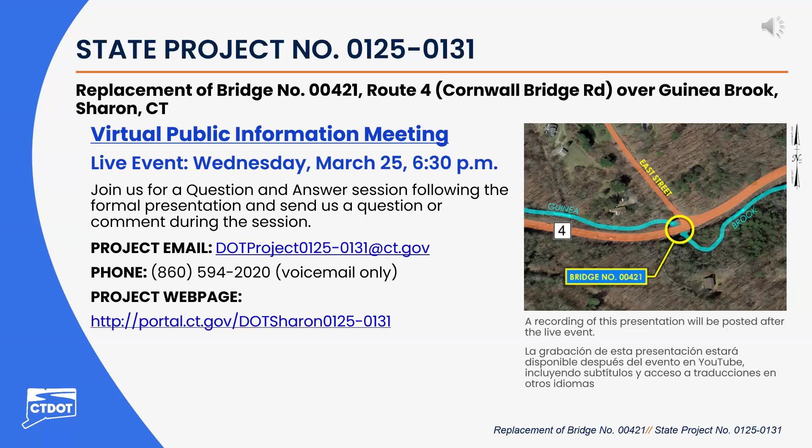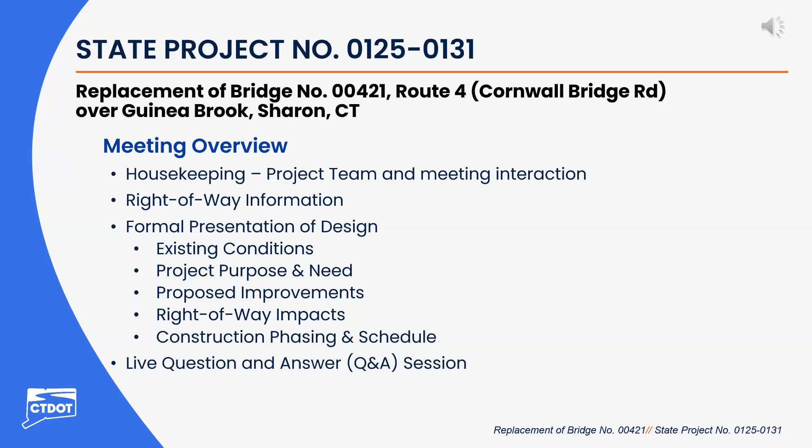Before we get started with the main presentation, I want to walk through the goals and format for tonight's meeting. First, I will introduce the project team, including the CTDOT leadership, the consultant liaison, and the design team. I will also explain how to interact with us during the meeting. Then we will have the technical portion of the presentation, which will include the condition of the existing structure, the purpose and need for the project, and the proposed preliminary design. Following the technical presentation, we will open it up for comments and questions.

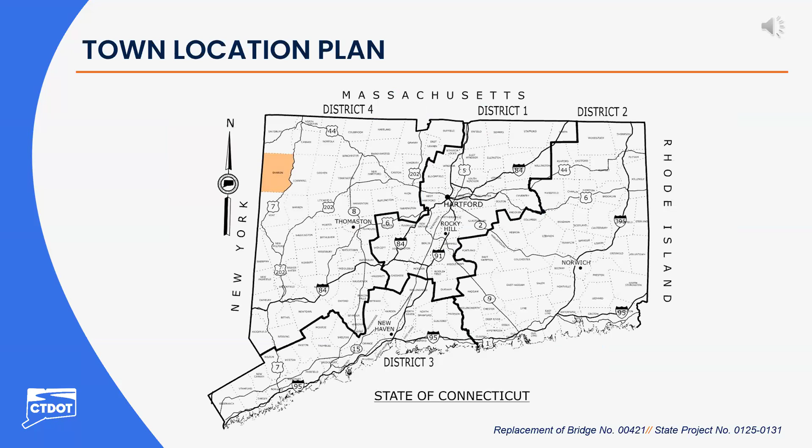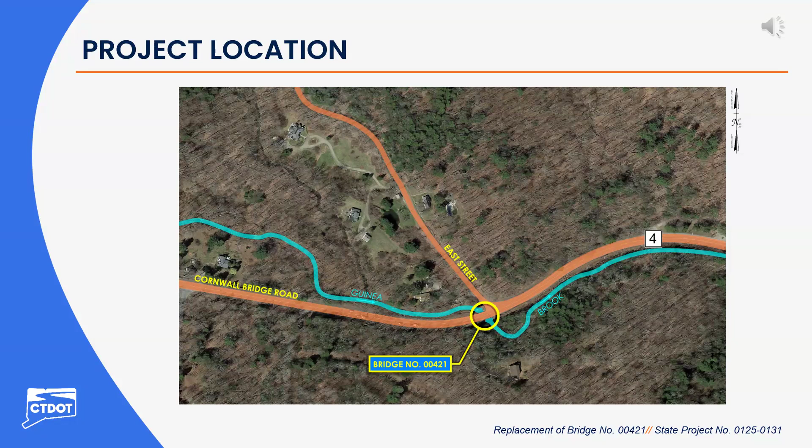This slide shows a map of Connecticut and highlights the location of Sharon relative to the rest of the state. Note that Sharon is part of Connecticut Department of Transportation District 4. Here you will see the location of the project site relative to Route 4 and East Street. I will now hand the presentation over to Jack Carlson to discuss the rights-of-way process.

Thank you, Corey. Good evening. My name is Jack Carlson, and I'm a project coordinator with the department's Division of Rights-of-Way. Our office is responsible for acquiring the private rights necessary for transportation projects.

As you'll see as the presentation continues, this project will require the acquisition of property rights, so I'd like to give a brief overview of the department's acquisition process. Any required property rights will be acquired in accordance with Connecticut General Statutes sections 13A73 and 13A98E, as well as the Federal Uniform Act. Additionally, I'd like to note that the specific right-of-way impacts for this project are still being finalized and may change as the project design progresses.

The right-of-way acquisition process begins once the project design has progressed to a development milestone and all of the impacts have been determined. At this point, each affected property owner will receive from our office a formal letter of intent to acquire, or what we call our initial letter, along with a property map which depicts the specific property rights that are being acquired. Next, our office will determine the fair market value of those property rights, which will be used to establish an offer of just compensation.

That offer will be sent out to the property owner in writing, and a rights-of-way agent will be available to meet with the property owner to explain the project, go over the specific impacts to their property, and review the department's offer. The property owner will then have a reasonable amount of time, typically 30 days, to consider the department's offer and enter into negotiations.

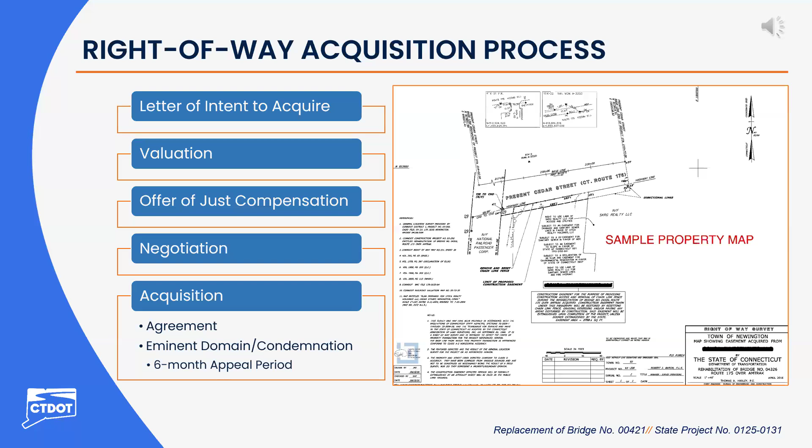Thank you, Jack. Again, my name is Jeff Parker. I am a principal engineer with CHA Consulting. CHA is a consultant liaison engineer for CTDOT, and my role is to work with the design engineer and help oversee delivery of the project.

I will be presenting the technical aspects of the project on behalf of the design team, including details of the preliminary design that is currently in development. First, some discussion on bridge number 421.

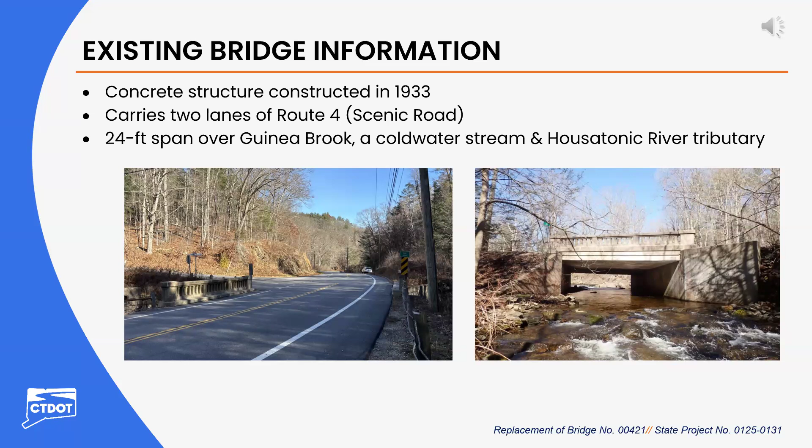This is a 93-year-old concrete structure built in 1933. The bridge carries 2 lanes of Route 4 and spans 24 feet over Guinea Brook. Interestingly, Guinea Brook is classified as a cold water stream and fish habitat and as a tributary of the Housatonic River. The latest bridge inspection was completed in March of 2025 and rated the overall structure in poor condition.

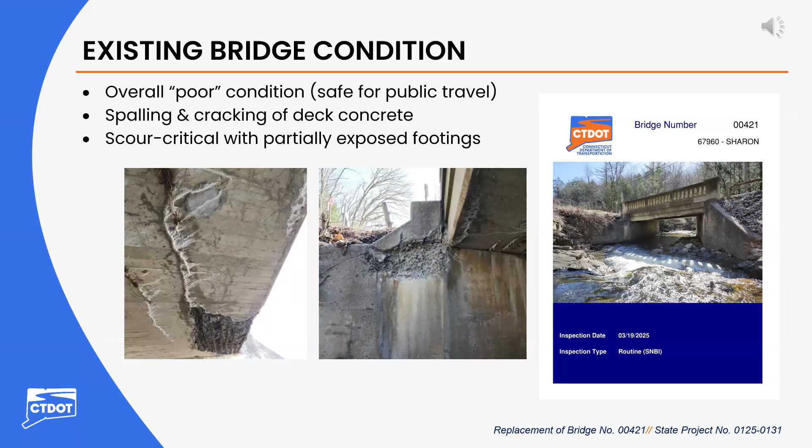The purpose of this project is to address the structural and hydraulic deficiencies of bridge number 421. The need includes providing a safe, cost-effective, and low-maintenance solution to address these deficiencies. The need also includes conveying the 100-year brook flows and providing scour protection at the brook crossing.

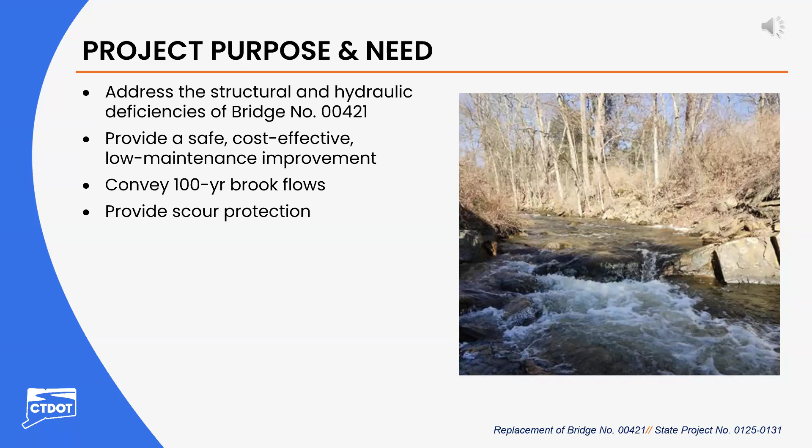The proposed bridge will span 39 feet over Guinea Brook, compared to the existing span of 24 feet, which improves the hydraulic capacity of the brook crossing.

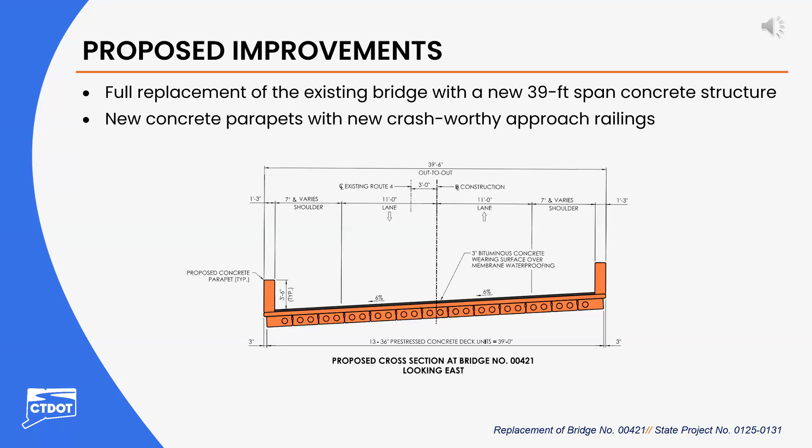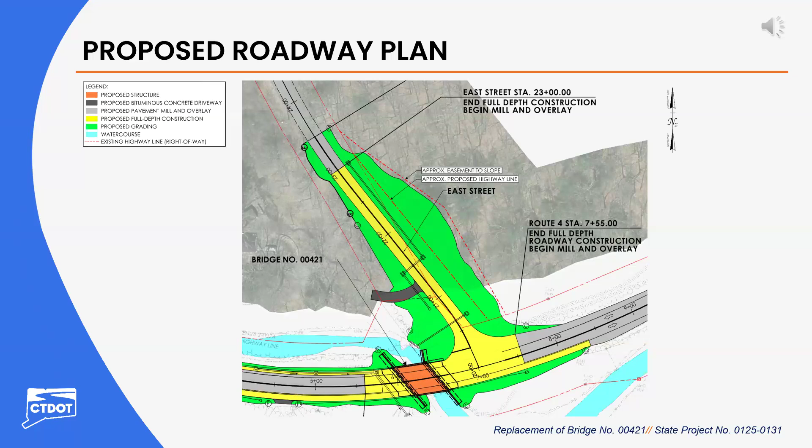There will be some permanent property impacts, which we'll discuss in a few minutes, due to the required grading along East Street, shown in green on the plan. The work along East Street will also include modifications and improvements to the existing drainage system and replacement of the existing pipe that outlets to the brook.

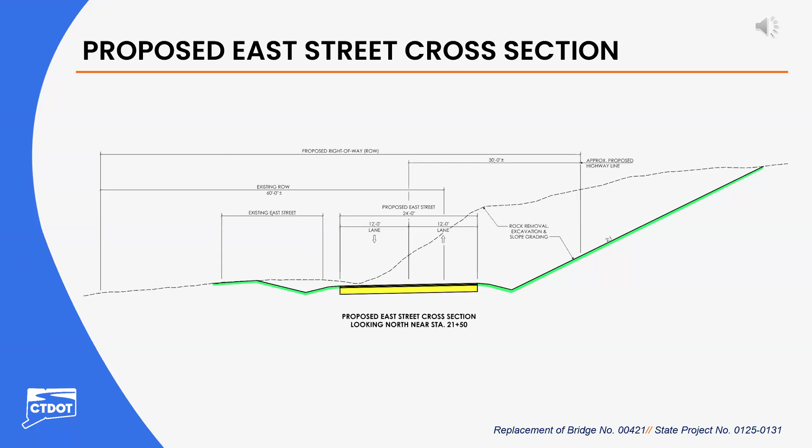The roadway is proposed to be 24 feet wide to meet the minimum standard width and will have graded swales as needed to capture and convey stormwater runoff along the roadway.

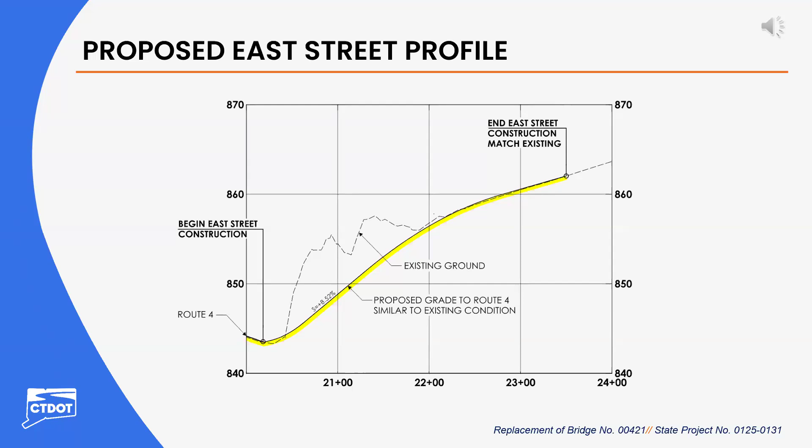The important point to note here is that the proposed grade on East Street approaching Route 4 will be approximately the same as the existing grade and will flatten out at the stop location.

As discussed on the proposed roadway plan, the realignment of East Street will provide space for a crash-worthy approach railing at the northeast corner of the bridge and will improve turning operations from East Street at the Route 4 intersection. This realignment will also have permanent right-of-way impacts on 272 East Street.

Moving on to the construction phase, safe travel through the work zone throughout construction is paramount for both the traveling public and for the construction and inspection crews.

We anticipate the project will be constructed in stages, with 3 primary stages needed to construct the new bridge and East Street improvements. Stage 1 will be the East Street realignment. Stage 2 will be the construction of the eastbound side, or south side, of the bridge. And Stage 3 will be the construction of the westbound side, or north side, of the bridge.

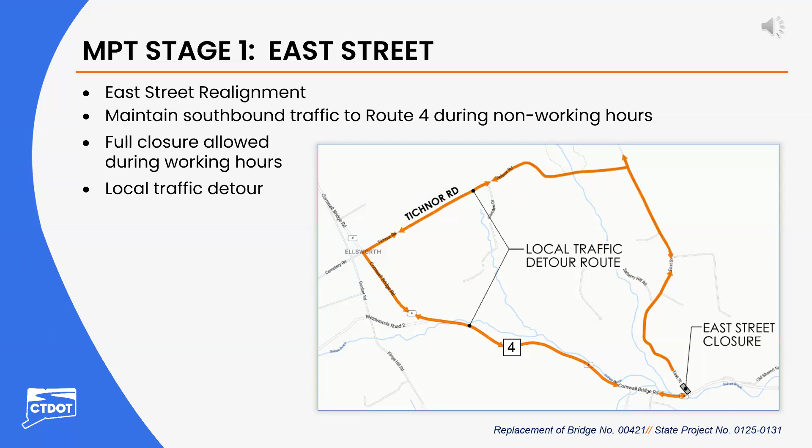Based on the latest traffic data, there will be approximately 130 vehicles impacted each time East Street is closed for Stage 1 construction. The MPT plan for Stage 2 will maintain alternating one-way traffic on the westbound side of Route 4 through the work zone for construction of the eastbound side of the bridge.

These signals will be red to hold traffic exiting these locations. When a vehicle arrives from East Street, for example, the Route 4 signals will turn red on both ends. Traffic will clear the work zone on Route 4, and the signal facing East Street will turn green, allowing the vehicle and other vehicles queued behind it to turn left or right onto Route 4. The signal at the driveway will function in the same way.

The MPT plan for Stage 3 is similar to Stage 2, except alternating one-way traffic will be maintained on the eastbound side of Route 4 through the work zone for construction of the westbound side of the bridge. The temporary traffic signal setup will generally be the same as Stage 2.

After Stage 3, the rest of the work on Route 4, including full-depth shoulder construction, milling and paving, and line striping, can be done under more temporary MPT measures with two-way traffic maintained on Route 4 during non-working hours.

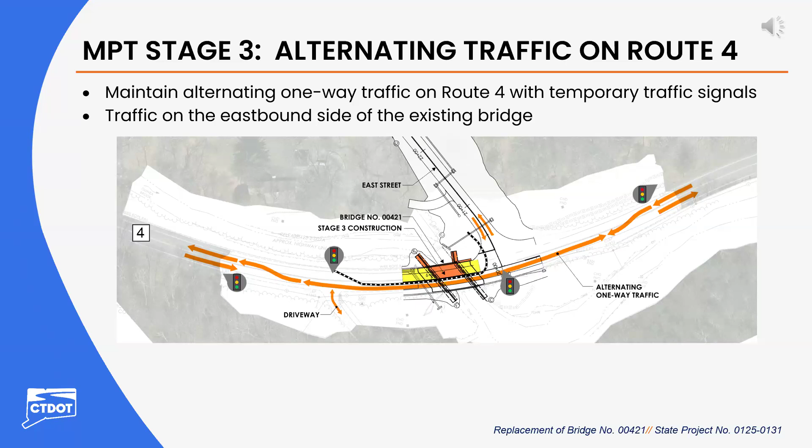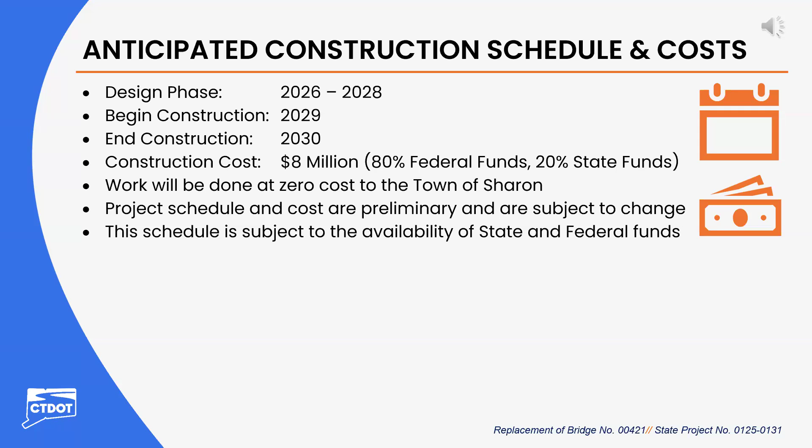The anticipated construction cost is about $8 million. The project will be funded with 80% federal and 20% state funds. No town funds will be utilized for this project. Please note that this schedule is subject to the availability of state and federal funds.

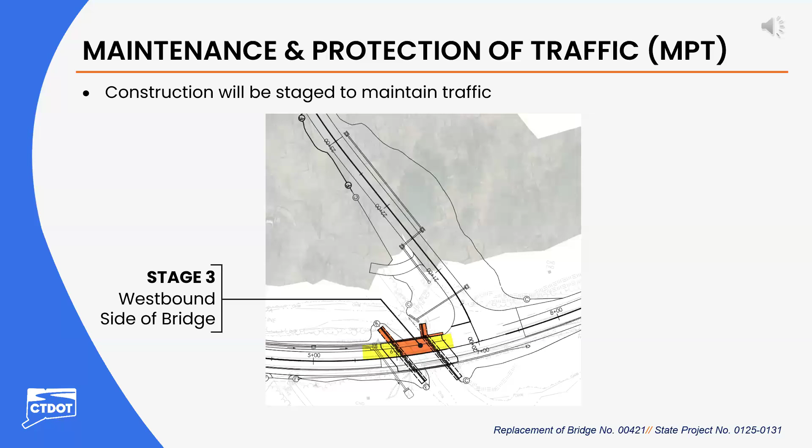Is it something we can work into this? Maybe, I can't speak to that. At this point in the design, it's pretty early, but I think we could definitely consider it. We'll have Corey and Jeff have a discussion about that. I'm not putting you against the wall, I'm planting a seed. We could talk about it as the design matures. You guys have a long way ahead of you.

Corey, certainly it's not our intent to negatively affect the access you currently have. As a designer, I just want to be sure we fully understand what your functional needs are for that access and exactly where it is. I know there's a hint of an access that shows up on the project survey, but it's not super well defined. It's something we'll take another look at out in the field. In terms of the nature of the access, you have vehicles going down there - is it just four wheelers, or walking access? What's the nature of that will be helpful. Obviously, you asked for a curb cut, so there's some sort of vehicle access you're looking for.

Yeah, we used to have a member that lived on the stream, the next house up on Route 4, on the east side. He's since sold the property and is no longer a club member. We used to park in his driveway to access the brook, and now we are without access to park a car and access our brook. So we're looking for a way to get access. We have frontage, the next area up after the driveway, and then another one after that house, but we're trying to figure out how to do that. So if there's a way we can work with you on this, it would be really great.

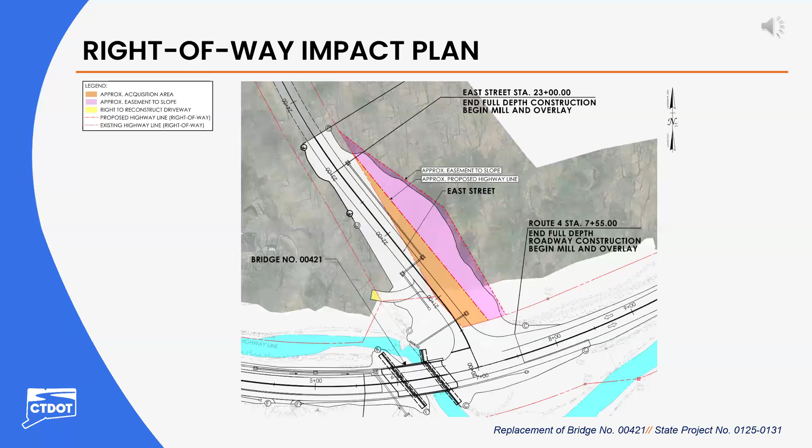That concludes the presentation.